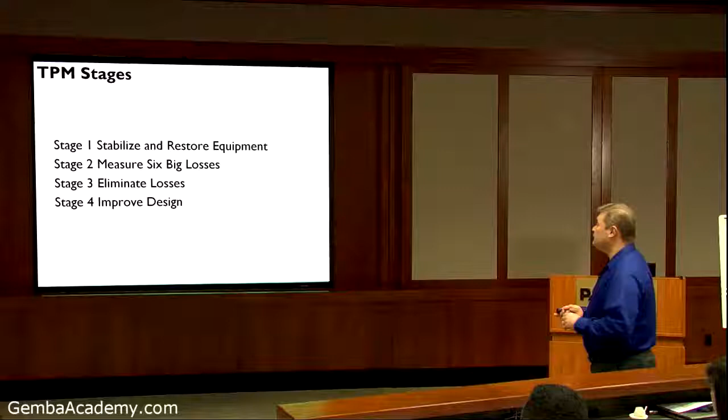So how do you do this? How do you do this TPM? There's really 4 basic stages.

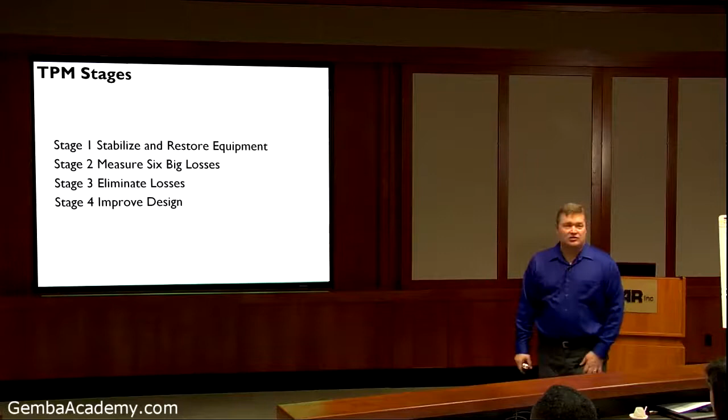First stage is you want to stabilize your current state and restore the equipment. Next is to measure the 6 big losses to know where your losses are coming from. Then you want to eliminate those losses as a source, and then start looking at improving your design, improving the design of your equipment so you can improve the process.

Okay, so the first step, initial cleaning. Now it's not a one-time event. It's not like a spring cleaning. It should be repeated on a regular basis, say monthly or every 6 months. You'd have a cleaning of this piece of equipment.

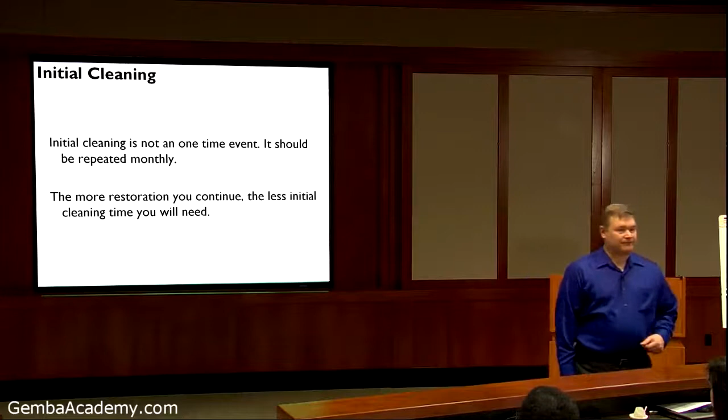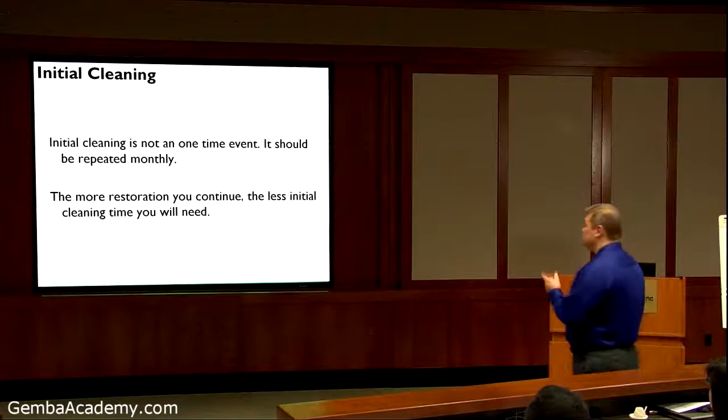The first time you do initial cleaning, it's going to be rough. It's going to take some time. I've seen it where it takes up to 3 days to do an initial cleaning on a piece of equipment. As you get better at this, it's easier, it takes less time. So know that - it should take less time as you go further in the system.

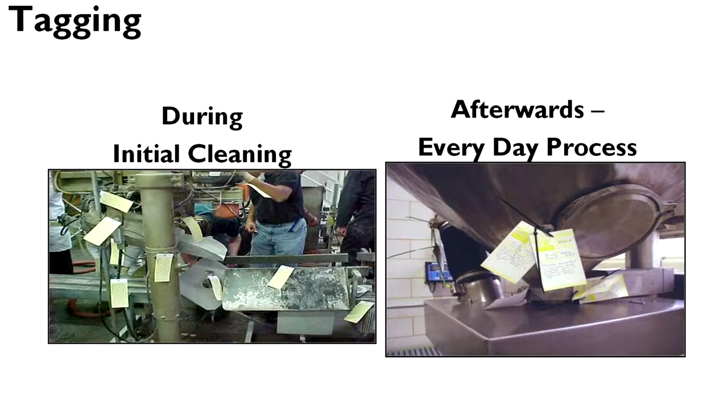When you're doing the cleaning, you can do some tagging on it. The tagging are issues that you find in the piece of equipment. So instead of fixing it right away, you just tag it and hang it onto the piece of equipment. And as you improve and fix those tags, fix the issues that are causing those tags, you'll have less and less tags when you do a process.

Here's an example. The outside of the machine looked pretty good, but when you started looking on the inside, it was pretty dirty. So it wasn't as bad as the first examples I was showing you because the outside looked really nice. But when you start getting into the machine, it looked like that other plant, only on the inside.

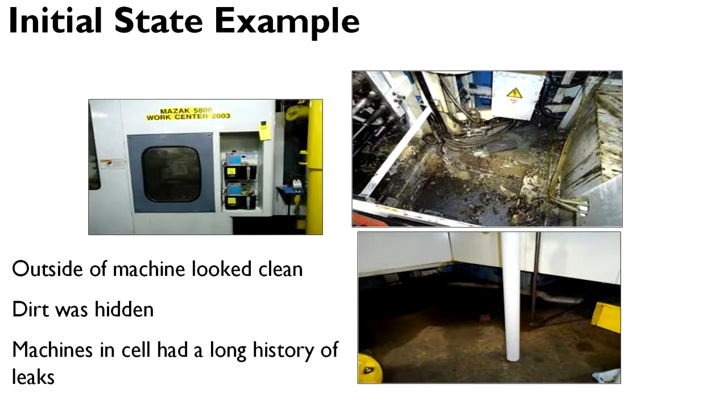And this machine had a long history of leaks. And the answer I was getting was, well, we looked at it, it leaks, nothing we can do about it. So we said, all right, no machine's going to leak, and we're going to fix that problem. So we did an event and looked at this.

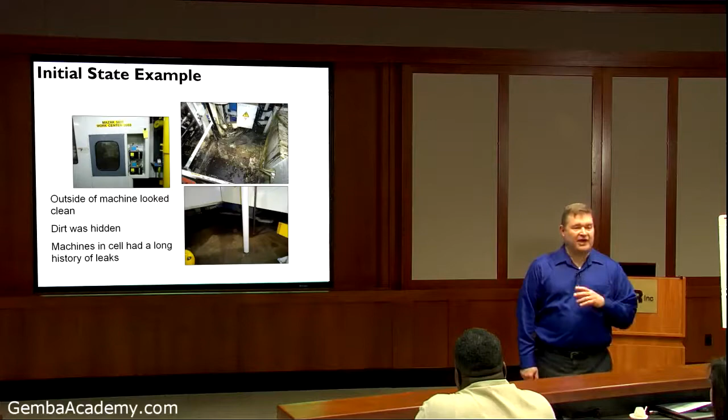When we did the initial event, we took out the chip conveyor underneath, and look what we found. Again, this was all hidden underneath the machine. So we figured that was a cause of the leak.

That's like clogged up and overflowing. And when they cleaned it out, they cleaned out the one end, but they never cleaned out the back end because they never pulled it out for 8 years. So we found another issue.

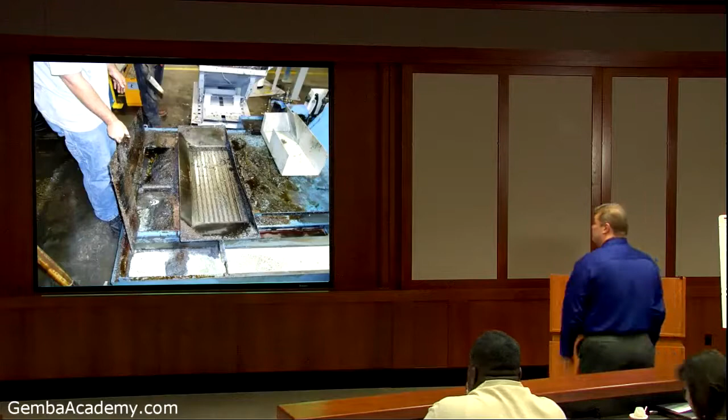So we took to cleaning it up, and then we also did an assessment on the machine. We went and gave it a once-over. This is a combination with the operator, management, and maintenance, all working together on this event. So we had the 3 components going through and giving the assessment.

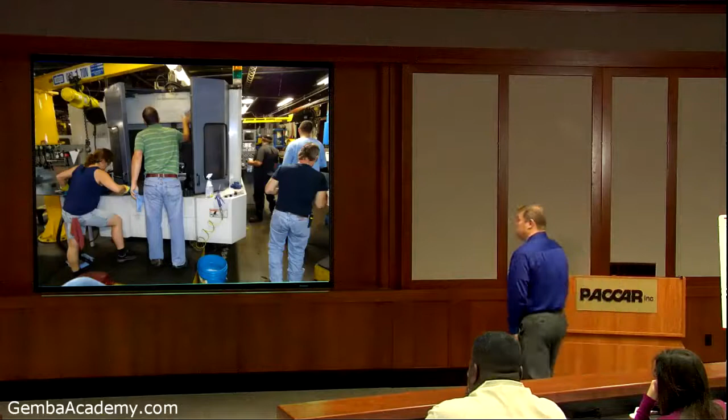When we clean the machine, even though it takes 3 days to clean it, we're cleaning to inspect. That's one of the key major differences on a TPM. When you clean the piece of equipment, you're inspecting it while you're cleaning it.

Now, some people may not know what to look for. This is where you teach them, and you ask them to look for things. So we have everybody going around the piece of equipment. Every time you swipe, you're looking. Every time you're touching, is it tight? Is there a leak coming here? So you're going over your piece of equipment with a fine-tooth comb.

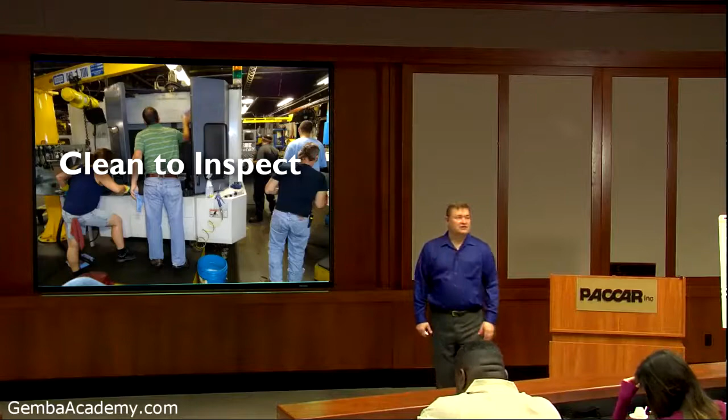In fact, in this example, we're climbing to the top, we're looking underneath, we're going inside, we're looking inside the equipment, we're going everywhere. Now, one of the things we know is that it's going to take about 3 days, so we actually had this piece of equipment planned downtime to shut down for this event to do the cleaning.

You can't just say, I'm going to do it tonight. So you've got to plan for some extra time on this cleaning because there's some things you're going to learn about it that you may not know.

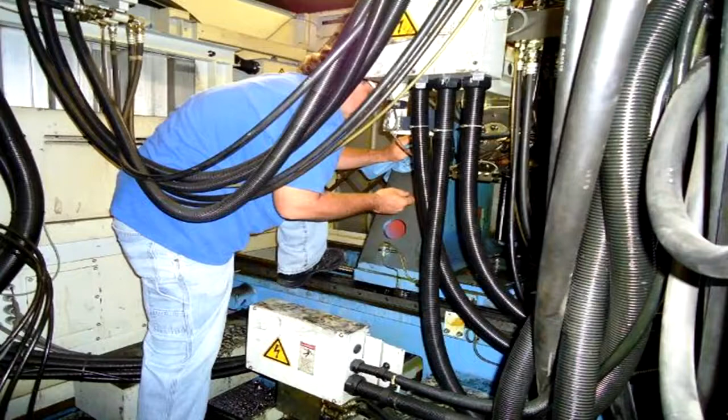So we get inside the machine, we're cleaning to inspect, and again, one of the goals is to find out why it's leaking. As we pull things apart, we're searching for it.

Now the interesting thing on this piece of equipment is we knew that the chip conveyor was overflowed and clogged, so we knew that was a leak source, so we cleaned that all up.

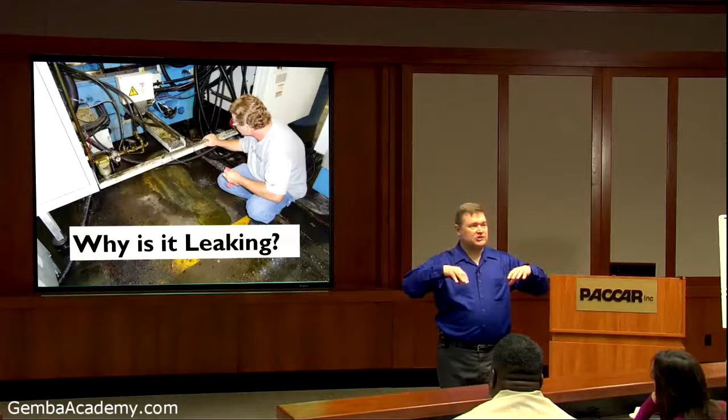We also realized that this had a trough system, so when the lubricants were being sprayed on it, it would migrate to these troughs. The troughs would go to a drain hole and go down. Well, guess what? Those troughs were full, the drain holes were plugged up, and it would just overflow over the side. That was another thing we learned.

We also learned that there was more than one trough. So maintenance knew of one, but they didn't know about a couple others. And the operator didn't know about any of them. So we all learned together.

So we cleaned it by going on the inside of the machine. And after we did all that, we thought that we had cleaned and found all the problems for the leaks.

What do you think we did? Did we? No, we didn't. We probably got 90%, but the thing is, once you cleaned it all up, and after we went through the whole process and found a couple issues and got that taken care of, we started the machine back up on a nice clean floor.

How soon did we know if we had a leak again? Right away. Not only did we know right away, we knew exactly where. And then from there, we know where to look. Maintenance never had that opportunity before because it was always dirty, always had oil film on the bottom. So not only did it help us find it, it helped maintenance solve the problem. They found another problem with it, they fixed that, and this machine doesn't leak anymore.

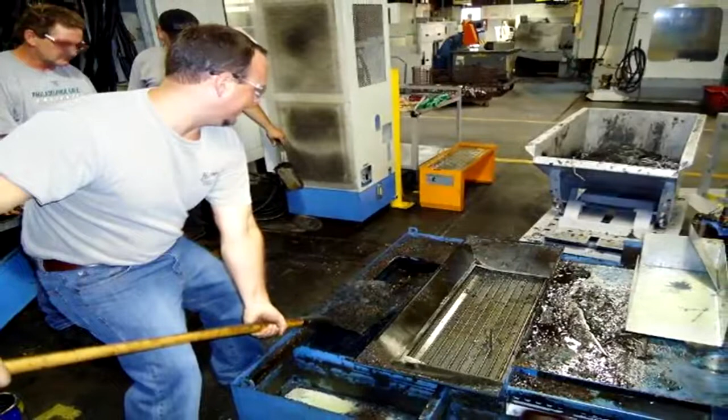So that's one of the benefits of why you want to go into deep cleaning. Again, it may be a mess to clean up, and that took a lot of shoveling. We filled that hopper full of scum. Yes, it's not a pretty job, but you have to do that to do the cleaning.

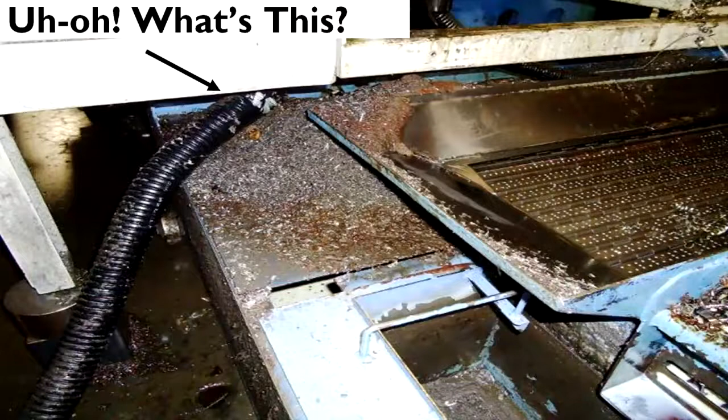Now, the other cool thing is when we took this out, we noticed something on this piece of equipment. Do you know what that hose is? It's flexible conduit, and it holds the main electrical connections from the control box to the piece of equipment. The main juice to this machine went through this, and it's broke.

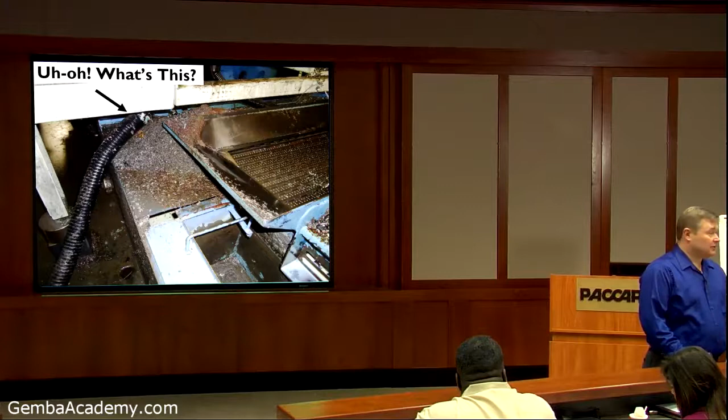What does that tell you? It's more than an uh-oh. It's, I'm glad I didn't hurt somebody or fry the equipment. Because if I would have short-circuited that, what would have happened? What kind of downtime would I have had? I could have killed somebody. So thank God that didn't happen. But then what kind of downtime would I have had on that machine if it would have fried?

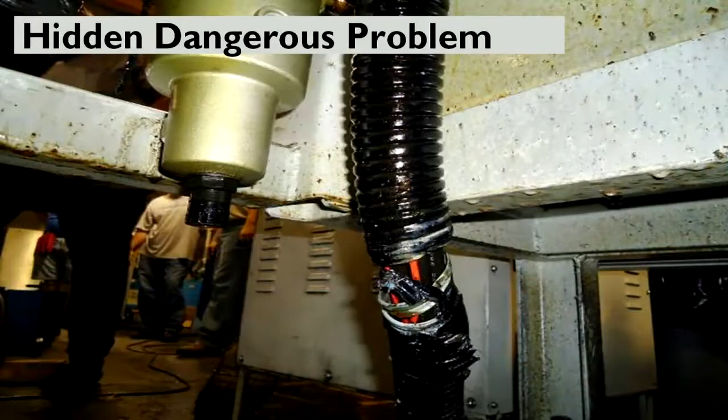Replacing motherboards and everything else for weeks. So when we pulled out this chip conveyor, we noticed that issue. Then when we crawled underneath it, we could actually see it was completely worn out. It was just a matter of time before it would have gotten to the wires. So we wanted to fix that.

Now what we did is the last step is to improve the design. If you can see in that picture, the control box is on the left, and the cabling ran underneath alongside the chip conveyor, which is the blue. So it caused the rubbing and the friction. That design was not good with that chip conveyor.

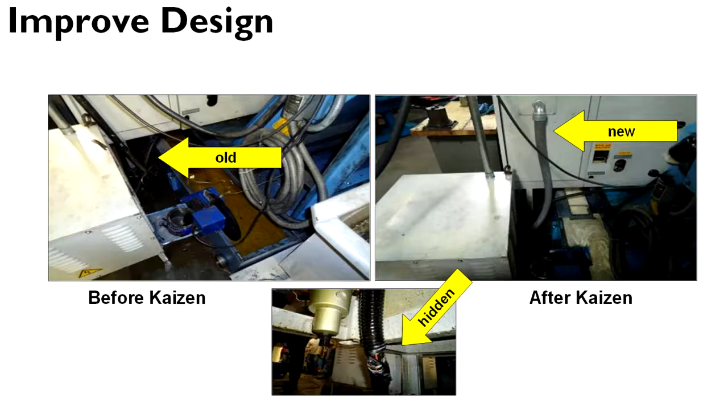So what we did is we got rid of that flex hose and got heavier duty conduit hose. We got rid of the plastic elbow joints and got cast metal. And we rerouted it from underneath the machine to the side of the machine, taking it completely away from the chip conveyor. We redesigned that machine to make sure that never happens again. Yeah, we could have just put more flex hose on it and stuck it right back there, but what would have happened? Same thing, okay?

So what we want to do is make sure that we focus on what the problem is and put in countermeasures to help make sure it wouldn't happen again. In this case, it may involve redesigning the piece of equipment, and that's what we did in this case.

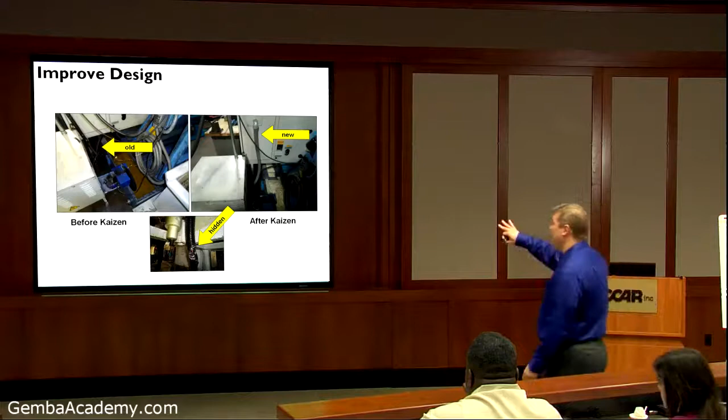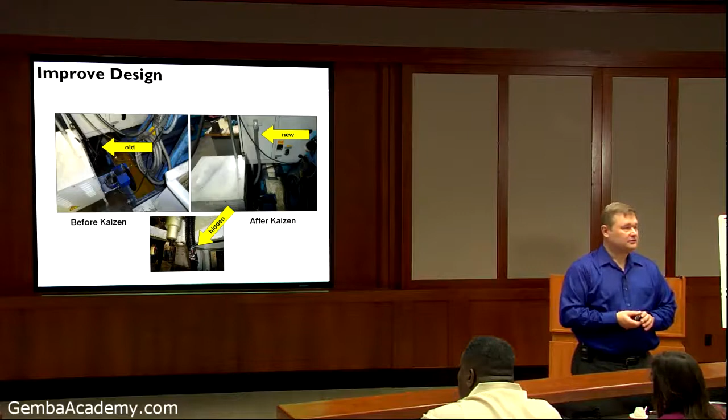So I was really proud of the maintenance group going through this with the operator, and they did this all within the week. So within the 3 days of downtime this machine was down, we had the parts in and done. No one got hurt, and we certainly don't have unplanned downtime on this machine because of that problem. And we would have never known it if we hadn't done a deep clean to inspect. It was completely hidden, and that's the point of what we want to do.

Also, when we do this tracking, we want to keep a log on the piece of equipment. A lot of times some maintenance departments don't have a good log, others have a good log, but we want to know the history of the machine. If we see a recurring problem or pattern in the machine, a log would be a good way to help detect issues or patterns, and that's what you're looking for.

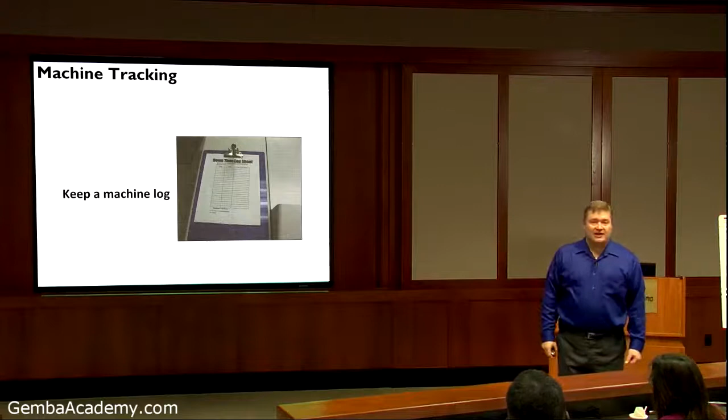So have a log sheet. It could be as simple as just a clipboard by the piece of equipment, to a fancy computer system that you may have in maintenance. But again, this is probably more reactive and has a short cycle from when the issue happens to when it gets logged into a computer, so you can see it real quick.